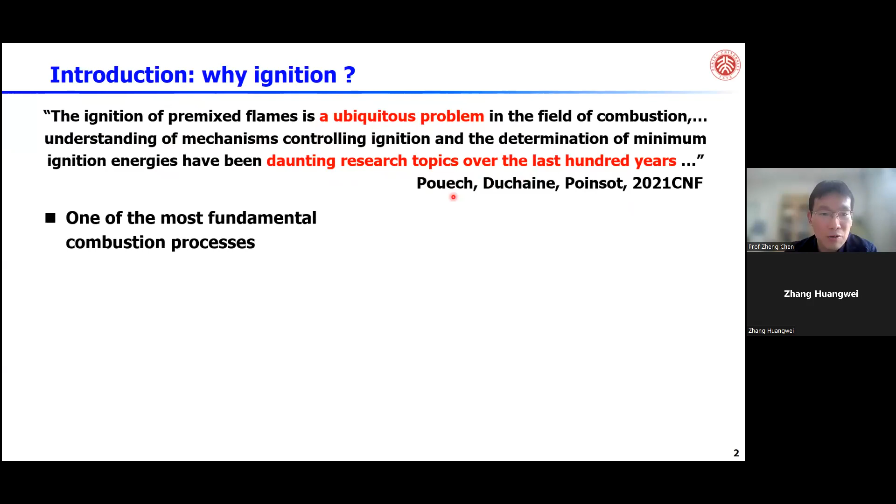Let's look at the applications of ignition. For example, ignition is very important to control in internal combustion engines and to develop superlean combustion. Recently, to meet the challenge of environmental regulation, people are trying to develop high efficiency internal combustion engines. In Japan, they have a program with a target for efficiency to reach about 50%. Basically, they use superlean combustion because superlean combustion has low heat loss to the wall, which can increase thermal efficiency to 50%.

However, if you have a mixture in a superlean condition, it's very difficult to ignite, especially when the mixture is near the flame limit. It's kind of difficult to ignite the mixture. So we need to understand ignition at this kind of superlean condition and make sure that we can get a successful ignition for superlean conditions.

Another example is about high altitude relight in jet engines. If you work under high altitude conditions with low pressure and low temperature, it's also very difficult to ignite. So you need to find some method to ensure that you can achieve successful ignition.

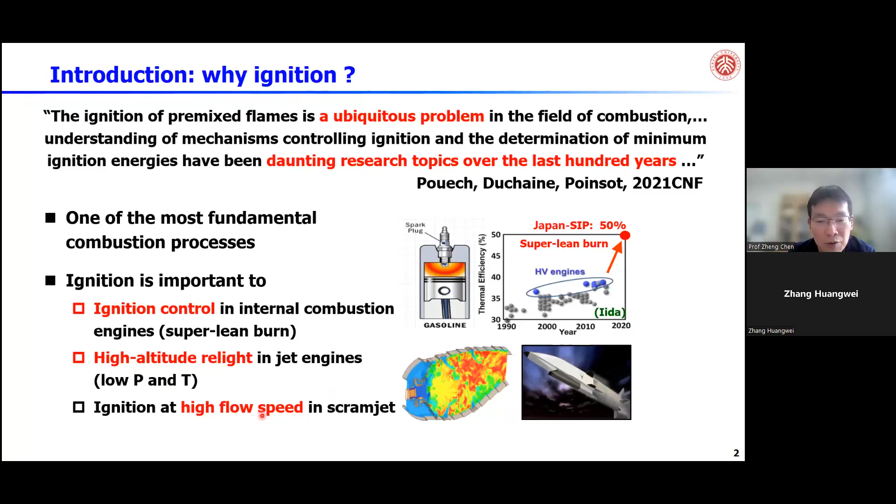The third application is about high-speed combustion, for example in a scramjet. In a scramjet, they have a very high-speed flow, so it's very difficult to ignite the mixture in a high-speed incoming flow. You need to find some method to ensure that you can maintain successful ignition.

The last example is actually trying to avoid ignition. For example, in fire safety and explosion, hot particles and accidental hot spots can initiate ignition and flame propagation. So we need to understand the mechanism for ignition, so that we can find effective ways to prevent ignition.

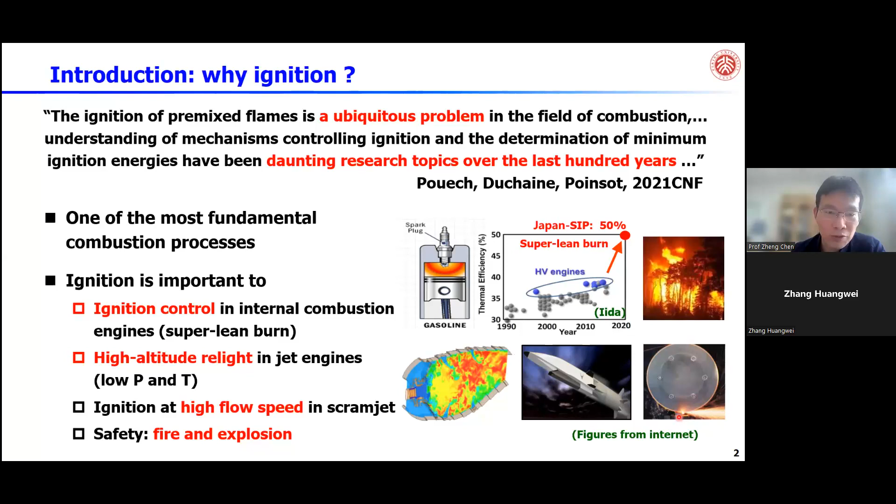So basically, this is the background for ignition. Ignition is very important, and there are many studies on ignition. This is a classical experiment on ignition: if you have a pair of electrodes and there's a discharge, this forms a plasma kernel, and eventually it can lead to ignition and flame propagation.

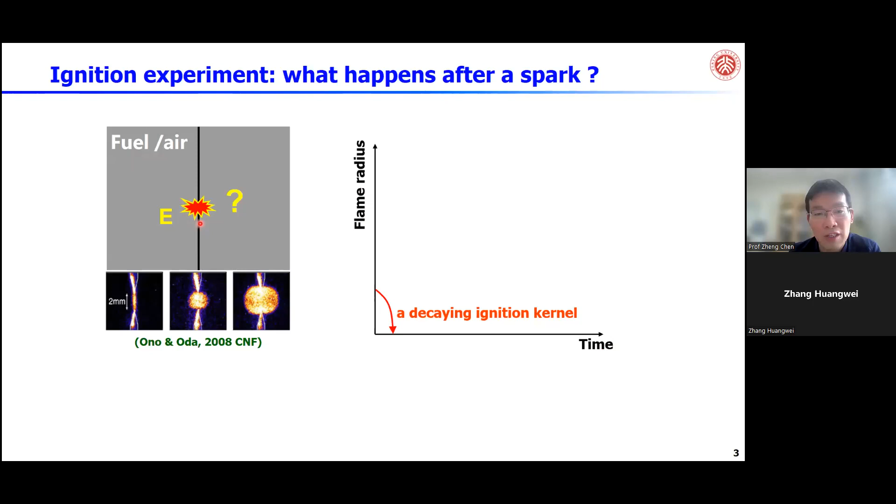Assume you have a fuel mixture and electrodes, and the discharge can get different ignition results depending on the energy and also the mixture condition. If we plot the flame radius as a function of time, the first scenario shows a decaying ignition kernel. Basically, if the mixture is below the inflammable limit, you cannot ignite it, or if the ignition energy is too low, you also cannot ignite it.

So this is the decay ignition kernel. The second case is that you have a stationary flame ball, which means that the flame kernel radius slightly increases, and at a certain stage it will remain constant. This kind of flame ball was only observed in microgravity experiments.

The third case is a self-extinguishing flame. The flame radius will increase continuously. At a certain stage, it will suddenly extinguish, so the flame just disappears. This is also observed in microgravity experiments.

The last scenario is that the flame radius continuously increases with time, so you have a propagating spherical flame that continuously propagates out, and eventually you can get a successful ignition. This depends on the mixture condition and the ignition energy. Basically, you have different outcomes from a spark ignition.

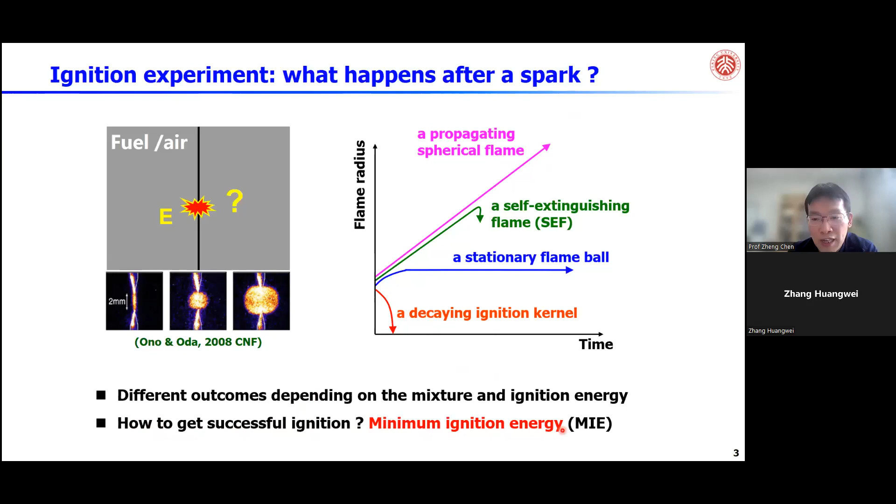So the question is that we are focused on how to get successful ignition, and we are interested in the minimum ignition energy that can help us achieve successful ignition. From the theoretical part, we are focused on two parameters: the first one is the critical length scale, and the second one is the minimum ignition energy.

The question is what is the critical length scale for flame ignition, and how is it related to the minimum ignition energy? If you read the textbook for combustion, there is a so-called thermal theory for ignition. It was mentioned that flame thickness basically is the critical length scale for ignition.

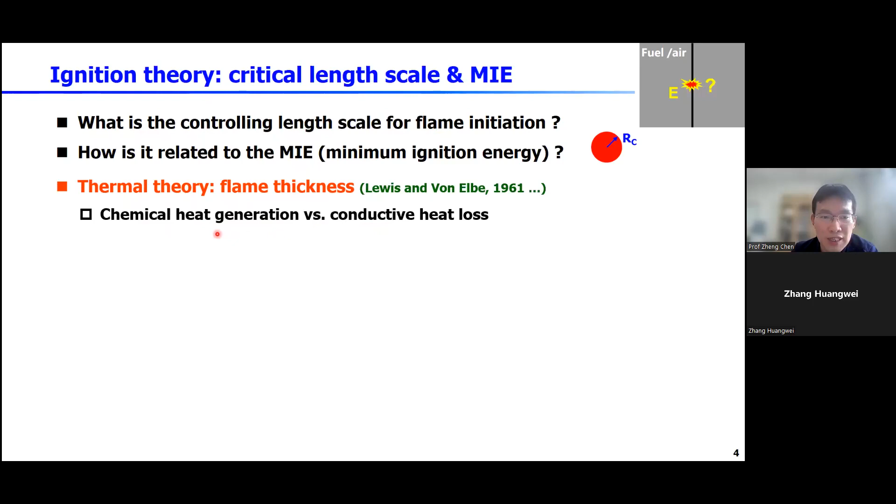Why is it flame thickness? It's based on the competition between chemical heat release generation and the conductive heat loss. If you have a successful ignition, the chemical heat release should be higher than the heat loss. If you look at the governing equation for temperature, there is the heat conduction loss term, and the generation term due to chemical reaction.

The critical condition is basically when these two terms balance. We know that the reaction heat release is proportional to the volume of the ignition kernel, and the heat loss is proportional to the surface area multiplied by the temperature gradient. After some manipulation, we can get that the critical radius for ignition is proportional to the flame thickness.

So this is written in the textbook: the minimum ignition kernel radius size is proportional to the flame thickness. And the minimum ignition energy is basically proportional to the cube of the flame thickness multiplied by the temperature increase from the initial temperature to the adiabatic flame temperature. This is a good estimation of the minimum ignition energy using the flame thickness.

This also helps explain why high altitude ignition is difficult, because at high altitude conditions you have low pressure. Low pressure means you have large flame thickness, and once you have large flame thickness, the ignition energy should be large. So it's very difficult to ignite at high altitude conditions.

But this theory is basically only focused on the heat loss and heat generation. It doesn't consider the fuel consumption. So afterwards, there were some theory improvements on this theory.

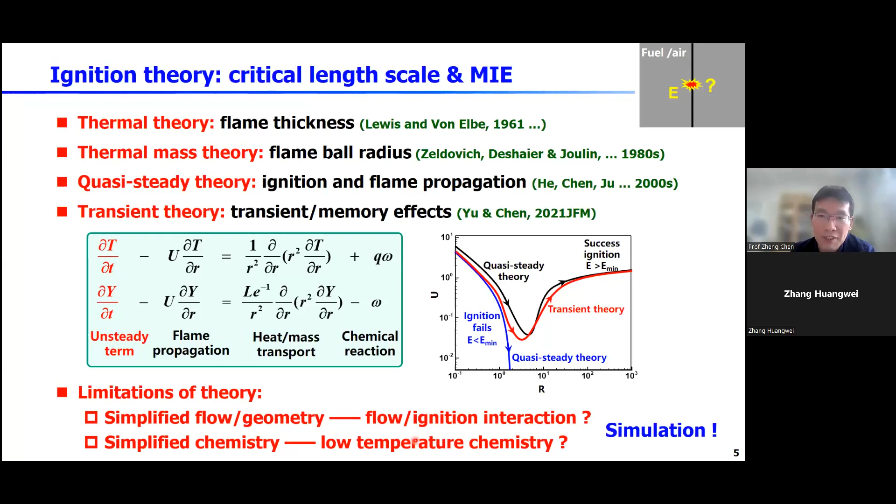However, in the ignition simulation, there are many challenges. This was also mentioned in the last seminar given by Professor Suo Yang. The ignition process is a multi-physics process. It includes plasma, shockwave, flow, and transport and reactions. And it's also a multi-scale problem.

In terms of time scale, it's picosecond, nanosecond, microsecond, and millisecond. And in length scale, it covers from micrometer, millimeter to meters.

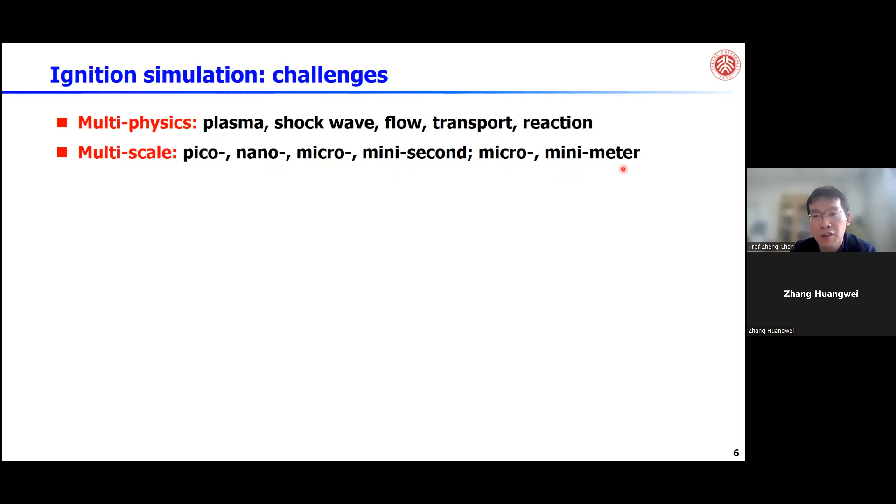For example, if you look at spark ignition, there are different phases. From the beginning, there's a pre-discharge phase, a breakdown phase, an arc phase, and a glow discharge. These different phases have different plasma chemistry and reaction processes involved. So it's very difficult to mimic and reproduce all these phases in the simulation.

If you look at laser ignition, similar to spark ignition, it covers a broad range of time scales. The initial laser pulse is on the scale of nanoseconds, and plasma emission is from nanosecond to microsecond to millisecond. The shockwave is around microsecond, and the ignition delay time or flame kernel development is from microsecond to millisecond. The combustion process and pressure rise phase is about millisecond to second.

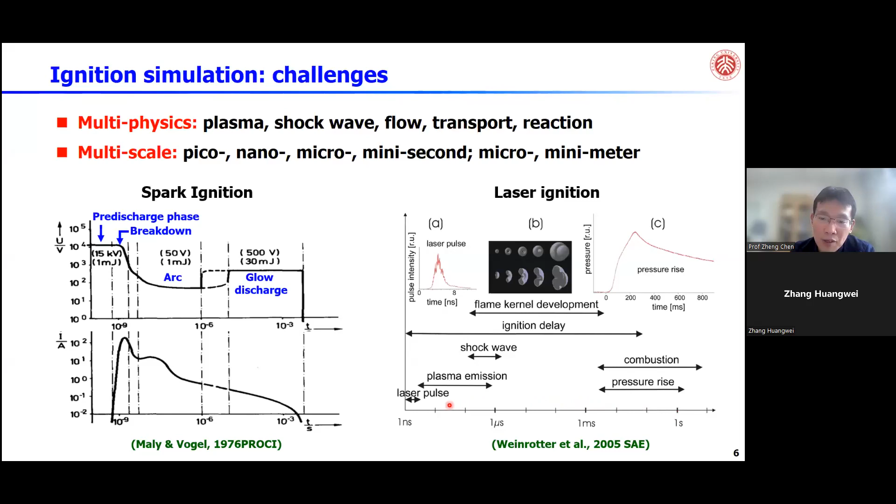So it's a very complicated problem with multi-physics and multi-scales. People are trying to use OpenFOAM to reproduce this kind of ignition process.

This work was done by a France group. They didn't use OpenFOAM, they just proposed phenomenological modeling for the ignition process. For example, in their simulation, the nanosecond repetitive pulse discharge model distributes discharge energy using different paths, for chemical energy, heating energy, and vibration energy, into the molecules. So it's a very complex problem.

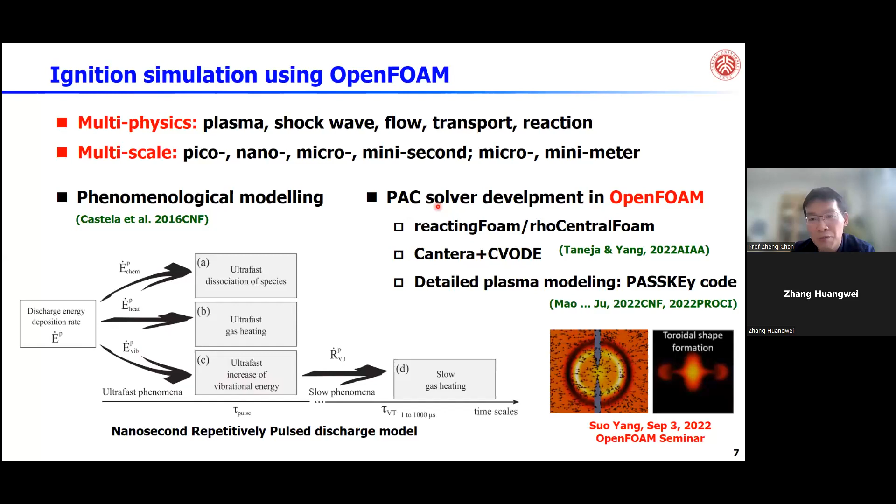In the last seminar given by Suo Yang, about a week ago, he talked about using the plasma assisted combustion solver developed based on OpenFOAM. They have two types of solver: one based on reactingFoam, the other based on rhoCentralFoam.

Basically, they want to simulate ignition in incompressible flow and compressible flow. They compile CANTERA and CVODE into their code. And to give detailed plasma modeling, they also use the PASSKEy code, which was used by Professor Ju's group in their recent work for ignition simulation.

So if you are interested in this kind of plasma ignition process, I refer you to the seminar given by Professor Suo Yang. In my talk, I will not talk about plasma stuff, and we only use a simplified ignition model to study the ignition process.

And they have efficient chemistry computations, with CVODE and automatic code generation for different chemistry, and also load balancing, which gives very good parallelization performance. It has excellent scalability and performance for reacting flow simulation.

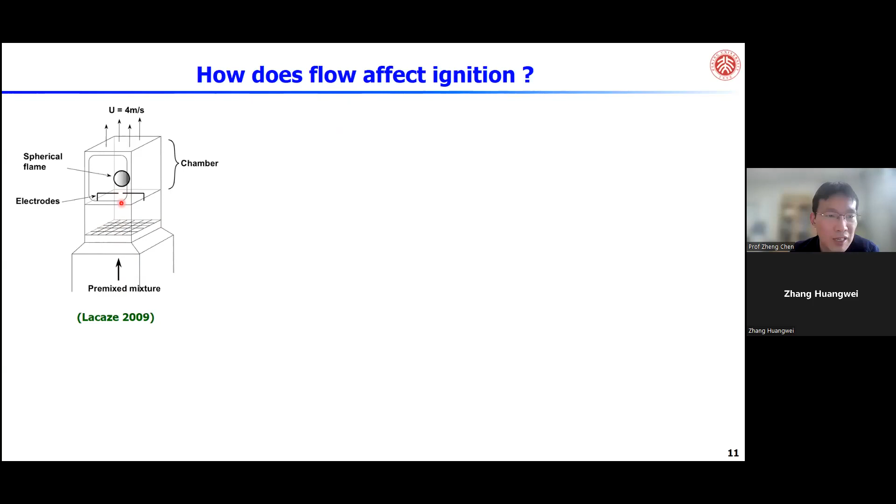In experiments, people usually use a static mixture, without considering incoming flow, to measure the ignition energy. But in practical engines, the inlet flow has some velocity that pushes the ignition kernel away from the electrodes. This flow field affects the ignition kernel development and the ignition energy.

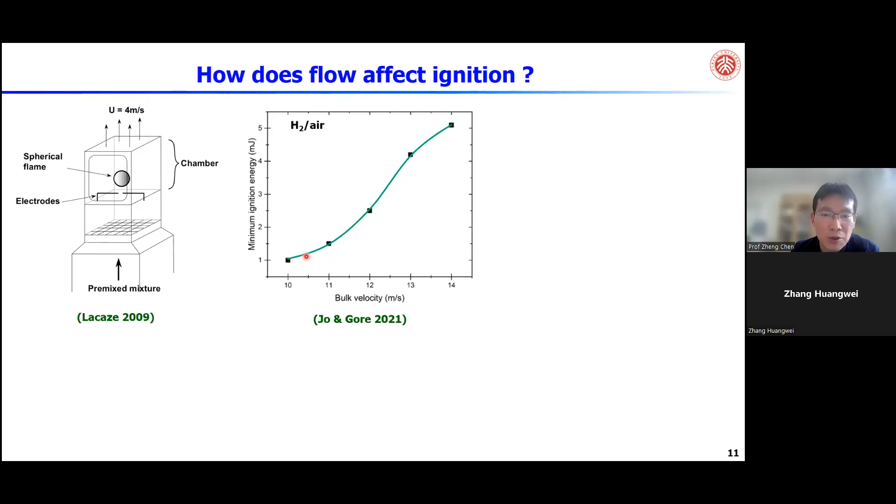This is from a recent experiment at Purdue University. They measured the ignition energy for hydrogen-air at different bulk velocities. You can see that the ignition energy increases continuously with the incoming flow velocity, and this is easy to understand.

As mentioned before, there is a conduction heat loss. If you have a uniform flow from bottom to the upside, the flow will bring convection heat loss. This convection heat loss will increase the heat loss and then make ignition more difficult. That's why the ignition energy increases with the incoming flow, because this term becomes larger and the heat loss becomes stronger.

Also, people are doing experiments using turbulence. For example, they have a mesh that can generate turbulence, and they can modify the mesh turbulent intensity, this U prime. Their measurement finds that the minimum ignition energy also increases with the turbulent intensity.

They have two stages, but it's kind of monotonically increasing. This is easy to understand, because if you have turbulence, there is turbulent transport. Look at this formula for heat conductivity: lambda 0 means the heat conductivity due to laminar flow, due to random motion of the molecules. The red part is the effective conductivity due to turbulence, because small vortices enhance heat transfer in the mixture. So this turbulent transport increases heat conduction, and therefore increases heat loss. This means the minimum ignition energy will increase with turbulent intensity. It's very easy to understand.

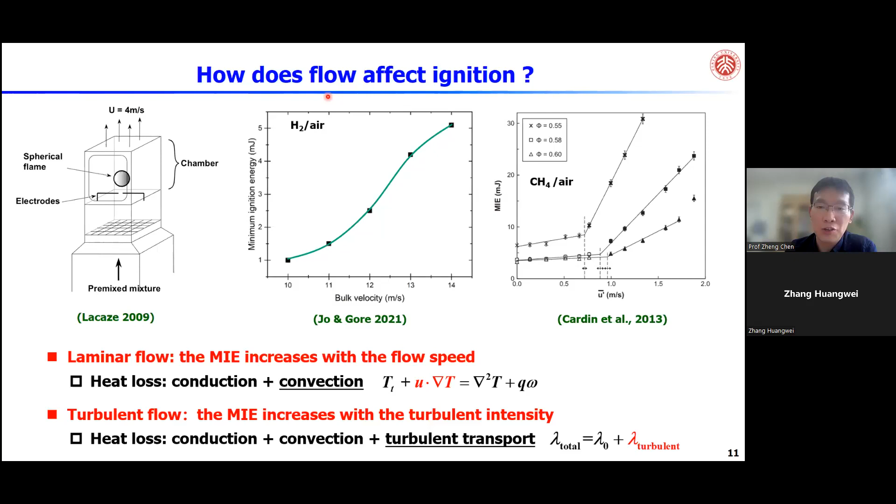So the answer to this question is that the flow will increase the ignition energy, and will inhibit ignition.

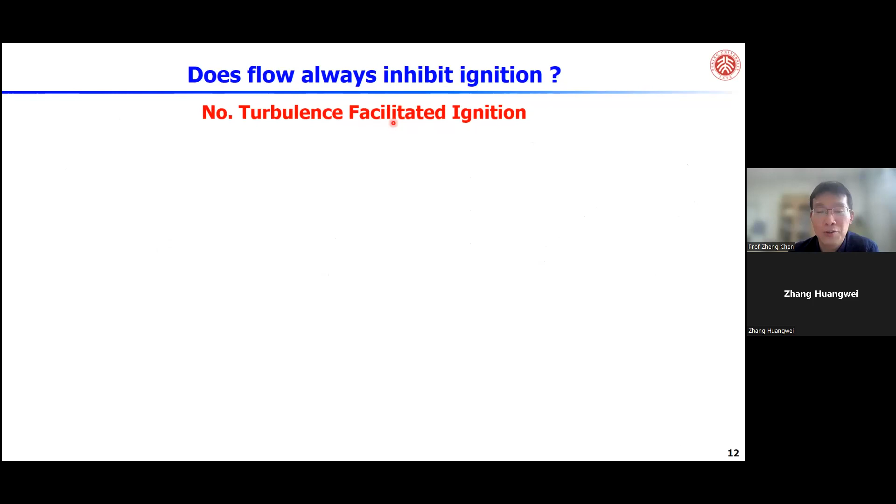However, we have the question: does the flow always inhibit ignition? The answer is no. Turbulence actually sometimes can facilitate ignition, it can help the ignition. This was found by Professor Law's group about 8 years ago. They have a paper in PRL.

That is in contradiction with our argument just now, because we mentioned turbulence will increase the heat loss and make ignition more difficult. However, the experiment found that ignition can be easier with turbulence. So the question is, why?

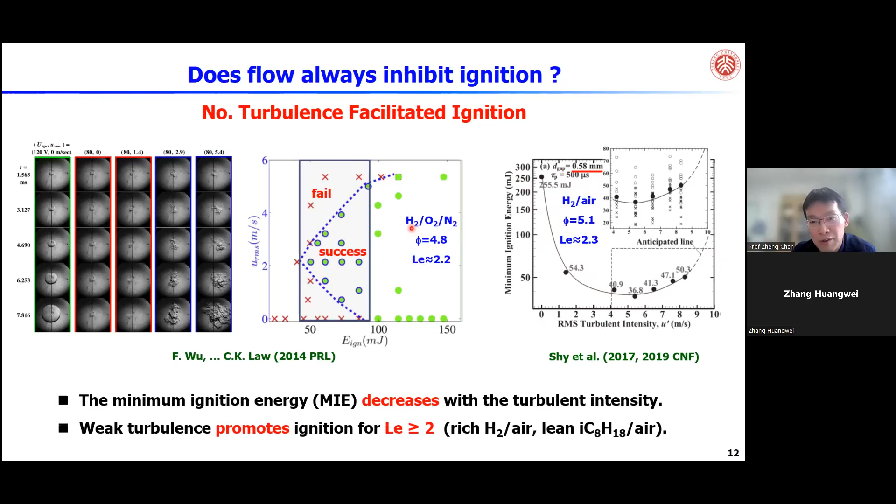Actually, they only found this for mixtures with large Lewis number. For example, for rich hydrogen, the Lewis number is about 2.2, and for hydrogen air it's about 2.3. The experiments basically show that the minimum ignition energy will decrease with the turbulent intensity for certain conditions, and weaker turbulence basically promotes ignition for Lewis number larger than 2, for rich hydrogen air and lean isooctane air. So this is kind of difficult to understand.

Actually, even though this experiment was done about 8 years ago, people are still working on how to explain this phenomenon. So why can turbulence enhance the ignition and help ignition? There are some explanations. For example, Professor Steven Shy gives the explanation as follows.

They think that when you have turbulence, the flame kernel will have this kind of deformed surface, and in some local positions, it's actually negative stretch. If you look at the stretch, this is the definition of flame stretch, and the stretch effect on the flame can be approximated by this formula: the Zeldovich number multiplied by the Lewis number and the stretch.

If you have positive stretch and Lewis number larger than 1, this part is negative, this is positive, which means this overall term is negative, meaning this kind of stretch will inhibit flame propagation. However, if you have negative stretch with a larger Lewis number, this is negative, this is negative, so the sigma becomes positive, which means negative stretch can promote ignition.

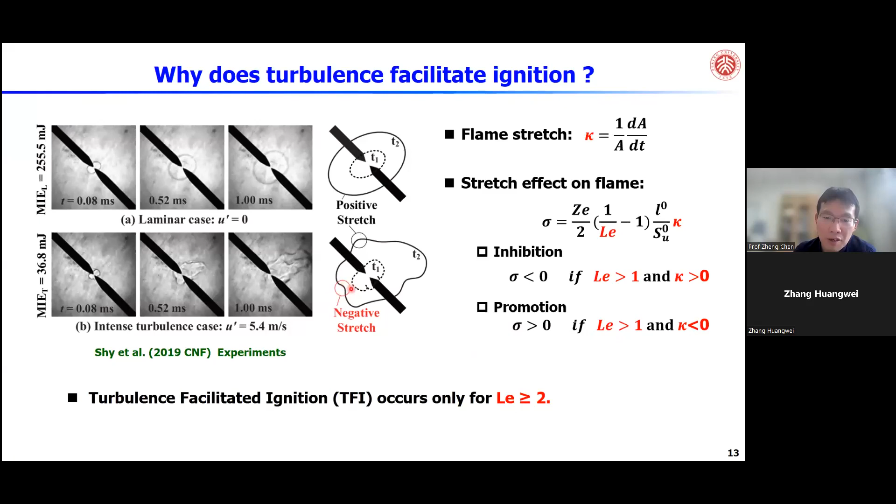So this is their explanation based on the flame curvature and the flame stretch. However, this kind of experiment was never repeated by simulation. So this is some three-dimensional direct simulation on the ignition in a turbulent flow. The top line is ignition in a flow velocity equal to 0, so it's laminar flame propagation.

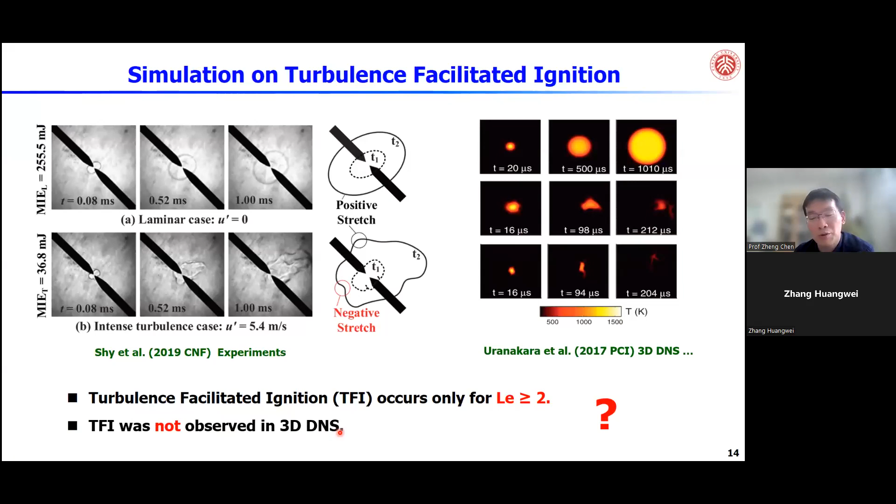But in these bottom two columns, there is flow turbulence that affects the ignition front. We can say that turbulence always inhibits the ignition. So turbulence facilitated ignition, TFI, was not observed in three-dimensional direct simulation. The simulation never repeats this kind of experiment, so we are wondering why we cannot repeat the experiments. This motivates our work.

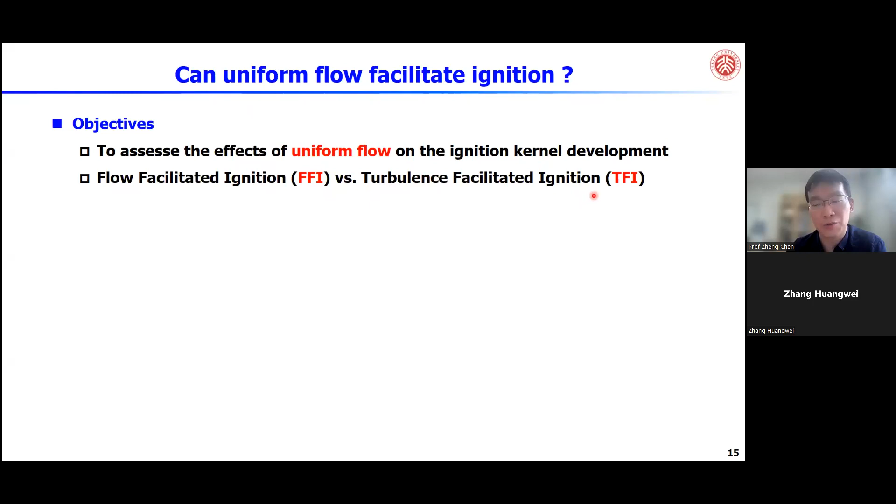Basically, we want to assess the effects of uniform flow on the ignition kernel development. We don't want to study turbulence, because turbulence is a very complicated process with many factors affecting ignition. We just simplify the problem to use uniform flow. And we actually found that flow facilitated ignition using this uniform flow has similar physics as the turbulence facilitated ignition, which I will talk about later.

So this is our model and method. Basically, we consider a hydrogen-air mixture at room temperature and pressure. We do 2D and 3D simulation. For the 2D static case with no flow, it's an axisymmetric process. But for three-dimensional, we have a lateral flow to the electrodes, and this ignition kernel will be pushed downward, so it's not axisymmetric. We need to do the three-dimensional simulation.

And for the ignition part, we use a very simple model. We just add the energy source term in the energy equation. This is the ignition energy equation. We have the cross surface area pi Re squared, and this d gap is gap distance, so this is the volume of the ignition kernel. This is the time duration for the ignition energy deposition, and this is the energy density for the ignition kernel.

We have the electrode radius fixed at 0.32 millimeter, and the gap distance we can change. The energy duration for the deposition is about 0.2 millisecond. We use EBIdnsFoam, based on OpenFOAM developed by KIT. More details can be found in our recent paper published at the Combustion Symposium.

So this is the first result on a quiescent mixture - we don't consider the incoming flow. There are different stages. First, you have energy deposition, the temperature increases, but there is no chemical heat release yet, because the chemical heat release has some auto-ignition delay time. After about 0.2 milliseconds, you have heat release, which generates an ignition kernel. This is the ignition kernel front - it's asymmetrical, and eventually the kernel propagates out.

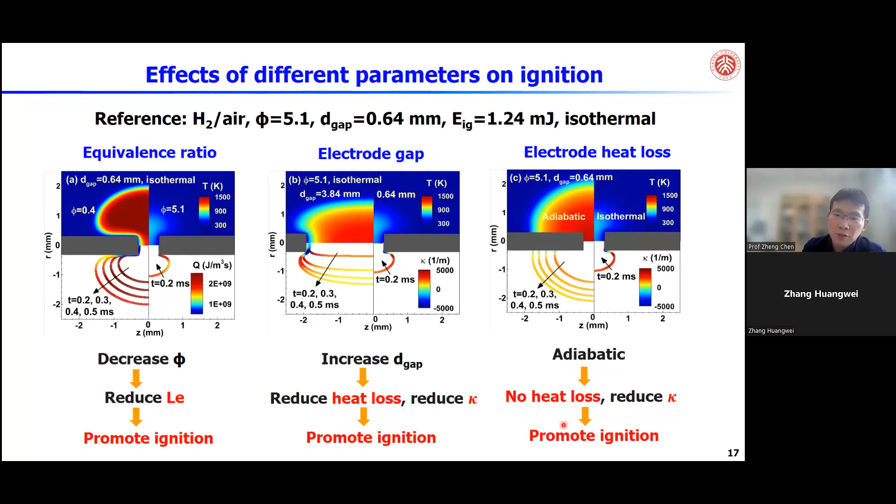So based on this knowledge, we next study the flow effect on ignition kernel propagation. There are three cases: a fuel lean case, a fuel rich case with a larger gap distance, and a fuel rich case at small gap distance.

For the fuel lean case, the incoming flow is fixed at 3 meters per second. It will make the ignition kernel fail to ignite, because the incoming flow actually enhances the convective heat loss.

It makes ignition fail. If you have a larger gap distance, it also cannot ignite the mixture, because even though the large gap distance reduces the ignition heat loss to the electrodes, the flow cannot further help reduce the heat loss to the electrodes.

Only for case C, the rich case, which was done in experiments for turbulent assisted ignition — only for the fuel rich case and small gap distance — can you see that the flow moves the ignition kernel away from the electrodes and greatly reduces the heat loss.

So that's probably the reason we can achieve flow-facilitated ignition. In experiments, turbulent facilitated ignition only occurs at a small gap distance like this, and only at a large Lewis number. This is also a large Lewis number for the rich hydrogen-air case, about 2.3. So basically this simulation is consistent with the experiments.

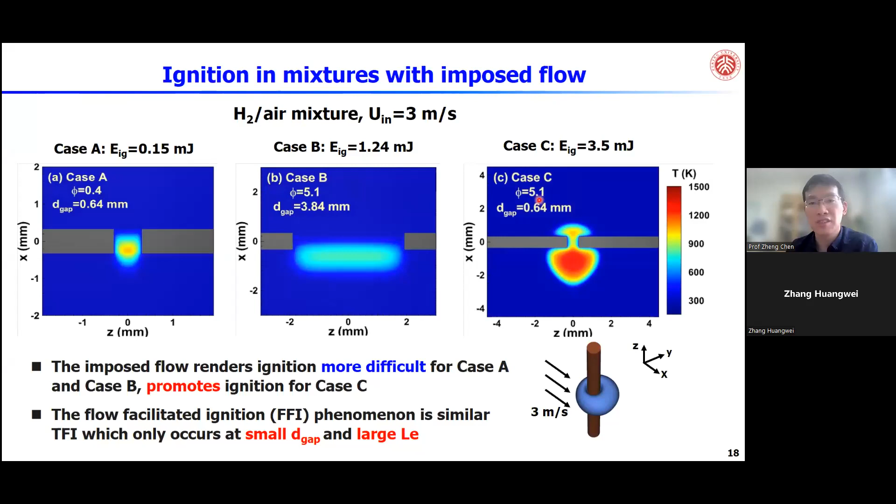So there are two reasons we can get flow-facilitated ignition. Basically, the flow can push the ignition kernel away from the electrodes to reduce heat loss. It can also change the shape and geometry of the flame front to reduce the stretch effect.

So basically, we explain why we can get flow-facilitated ignition.

In turbulence, people use negative stretch to explain ignition. For turbulent facilitated ignition, we think this is not fully correct. You also need to consider the electrode effect.

First, we look at ignition caused by hot particles. Let's look at the background. Hot particle ignition is important to aircraft safety, because if you have lightning producing hot spots, it can cause this kind of accident.

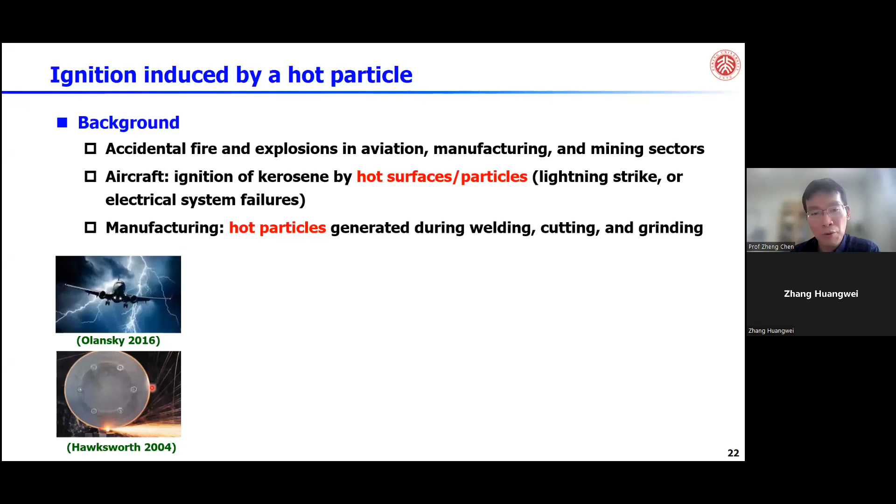In manufacturing, a hot particle can generate an ignition process. So people are working on ignition temperature for different mixtures and particle sizes, for methane, for hydrogen, at different particle sizes. They have experiments, simulation, and recently we also conduct some theory.

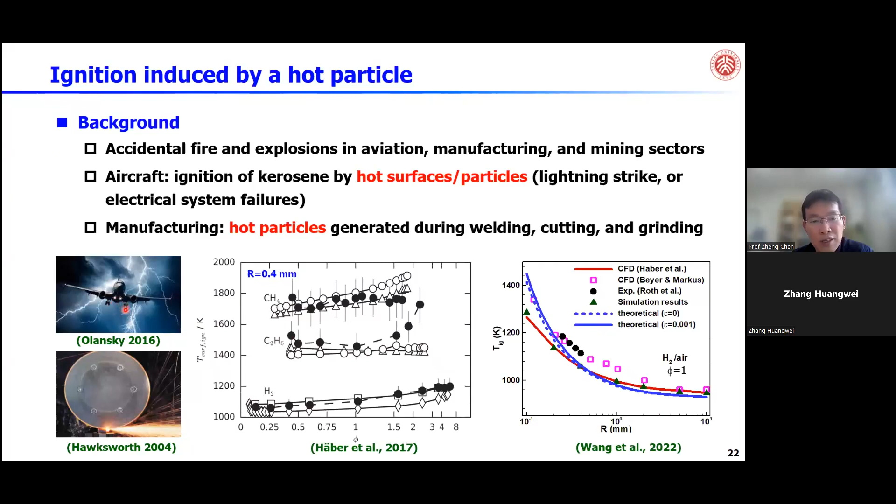However, in all these experiments, they didn't consider the low temperature chemistry. For example, for hydrocarbon fuel in jet fuel, they have low temperature chemistry. So we want to know how low temperature chemistry affects ignition.

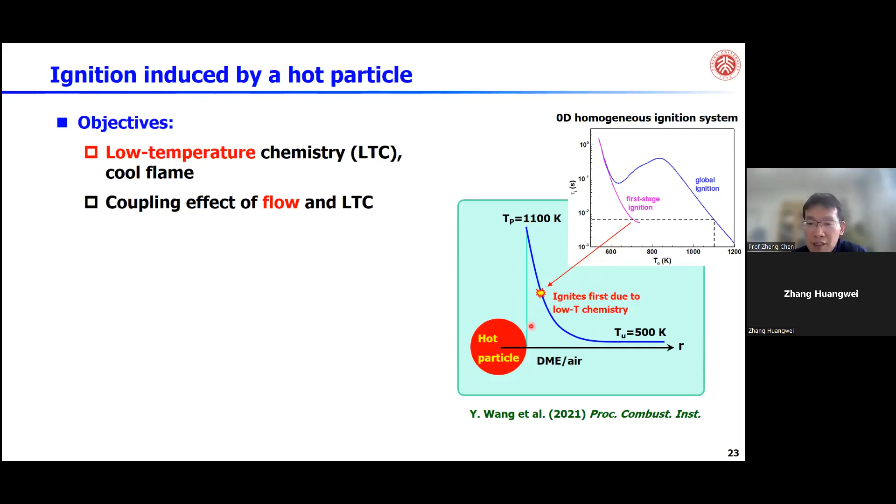For example, if we look at this scenario, if you have a hot particle at high temperature, about 1100 K, and the room temperature is about 500 K, actually the ignition doesn't happen at the surface, because even though the surface has a high temperature, it's in the NTC regime, meaning there's some place with the highest temperature due to the low temperature chemistry. So the ignition might happen some distance away from the surface.

So we use one-dimensional and two-dimensional simulation to study how the low temperature chemistry affects this kind of particle ignition.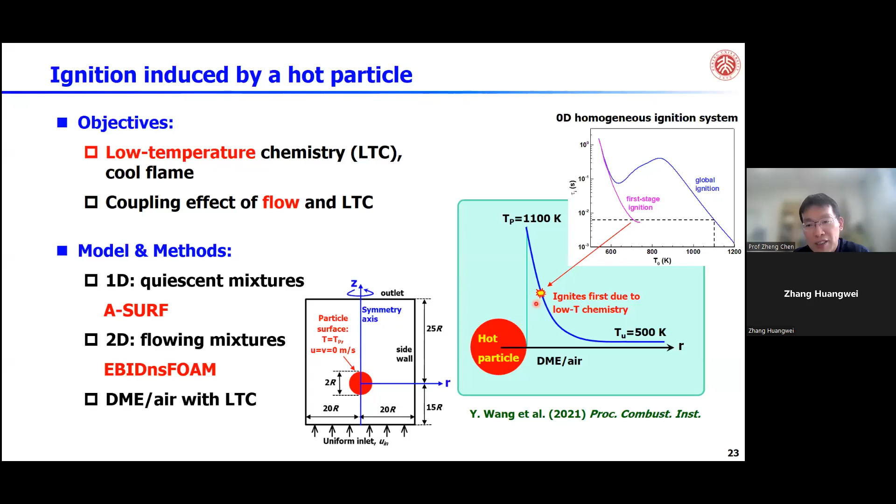The first scenario considers just the one-dimensional case, meaning there is no inlet flow. Everything is static, so it's a spherically symmetrical problem. We just do one-dimensional simulation. Here is the radius, and here is the time. The particle radius is about 1 millimeter, so this is the particle side.

Here is the heat release rate contours. We consider the particle temperature to be 1300 K. You can see there is a weak heat release rate corresponding to a cool flame. And on the surface, there's a hot temperature chemistry-induced ignition, because the heat release there is much higher than in the cool flame region.

We also calculated the propagation speed. We found the cool flame is pretty slow, only 6 centimeters per second, but the hot flame is about 5.4 meters per second, much faster. Eventually the hot flame can catch up and merge with the cold flame. In this simulation, we consider the low temperature chemistry.

If we remove the low temperature chemistry, we found you only get a hot flame, meaning there is no cold flame. We also calculated the ignition delay time for different particle temperatures. We found that low temperature chemistry greatly reduces the ignition delay time, because it accelerates the ignition process and thereby reduces the required ignition temperature.

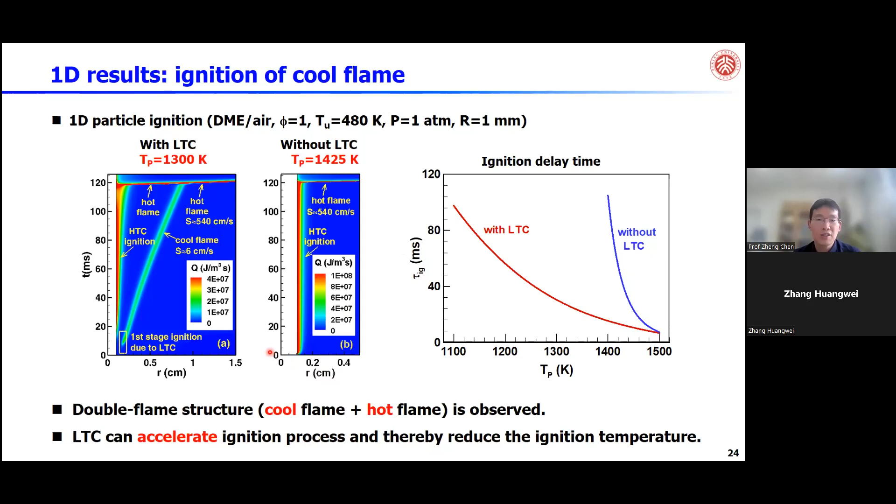So this is the one-dimensional case, and we also consider the two-dimensional case. There's a uniform incoming flow from the bottom to the top. You can see the flow velocity is small, 0.15 meters per second. The right side shows the concentration of CH2O, and the left side shows the temperature.

You can see on the right side this curve, labeled ABC, is basically a cold flame, because the temperature is below 1000 K, and there's a lot of CH2O produced, due to low temperature chemistry. But on the surface, the temperature increases to 1500 K — this is high temperature chemistry induced. So there is a cold flame propagating outside, and also a hot flame propagating from inside to outside.

Eventually the hot flame becomes pretty large, and the cold flame is still outside, but the cold flame speed is much smaller than the hot flame speed. So eventually the hot flame catches up and merges with the cold flame, so only one hot flame can be observed. This is for low flow speed.

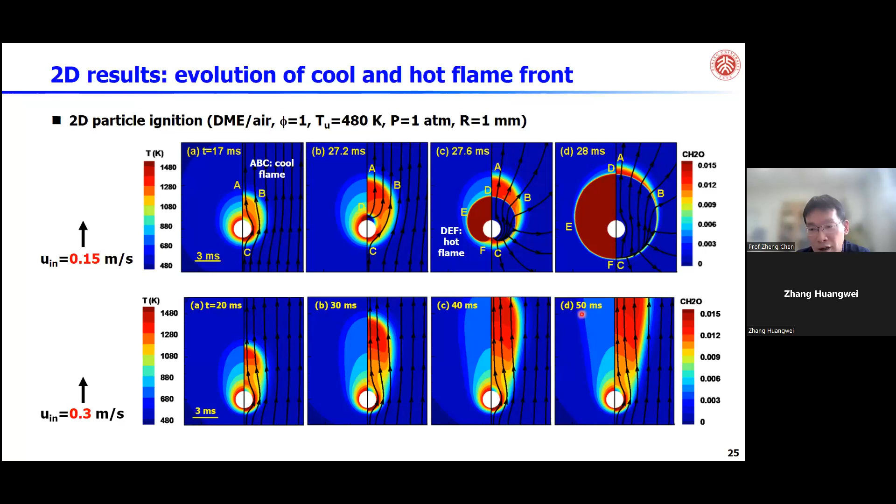Here we don't have heat loss. Actually, this promotion effect of flow on ignition is due to the boundary layer development at different flow speeds.

So this is on the hot particle, basically pre-mixed flame. We also look at the ignition in a mixing layer, which is a non-pre-mixed flame. We want to know how the low temperature chemistry affects the ignition in a mixing layer.

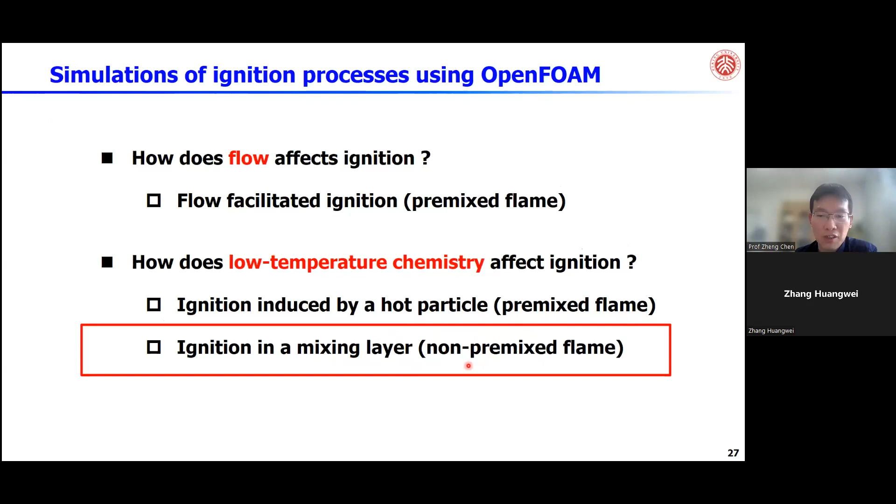Actually, for the non-homogeneous ignition, they have broader application. For example, in the engine, you have a jet of fuel injected into hot air, and there's some local ignition, actually it's non-pre-mixed ignition. And in the internal combustion engine, people can see that there's a cold flame induced during the injection, and there's a cold flame front propagation. However, there is no study on how the low temperature chemistry and the cold flame affects the ignition of the non-pre-mixed flame. So this motivates our work.

Basically, we want to know how the low temperature chemistry affects the forced ignition in a mixing layer, and we want to know how the cold flame evolves into a hot flame.

So basically, our model is a mixing layer. In the top is the dimethyl ether, and in the bottom is the air. And the mixing layer we fix about 2 millimeters. And in the center we have a hot spot, and it's an axisymmetric problem. The hot spot basically has a fixed radius about 0.5 millimeters.

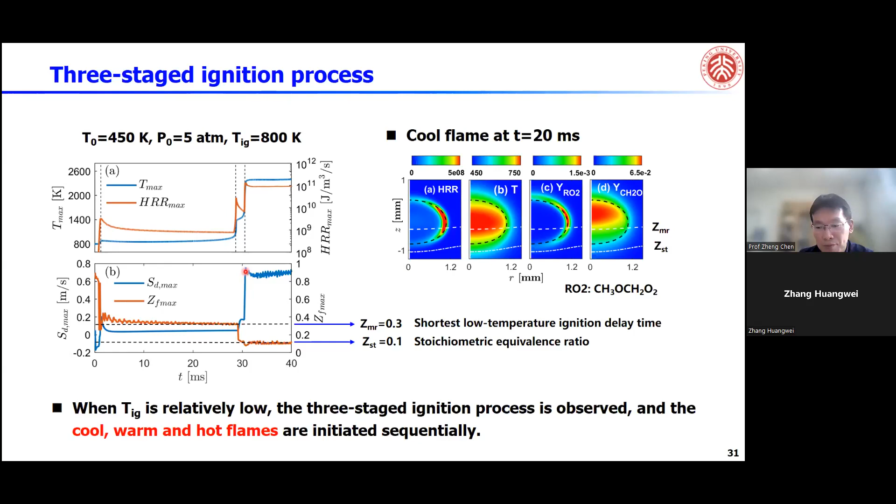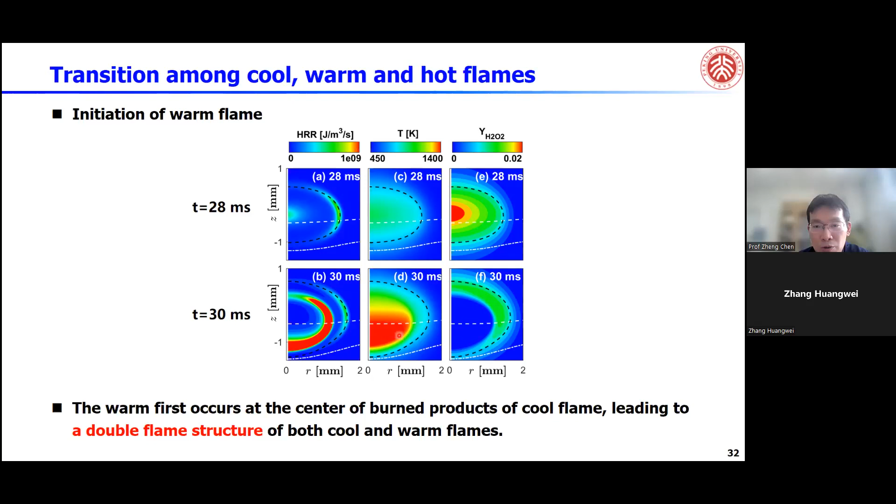So this is the initiation of the warm flame from 28 milliseconds to 30 milliseconds. You can see the stage where the heat release becomes much stronger, and H2O2 can be gradually produced, and the temperature will increase to around 1000 K. Furthermore, if the time is larger than 30 milliseconds, it will evolve into a hot flame, because the cool flame stage and the warm flame stage are actually very short. This is the warm flame stage. Eventually, it will evolve into a hot flame.

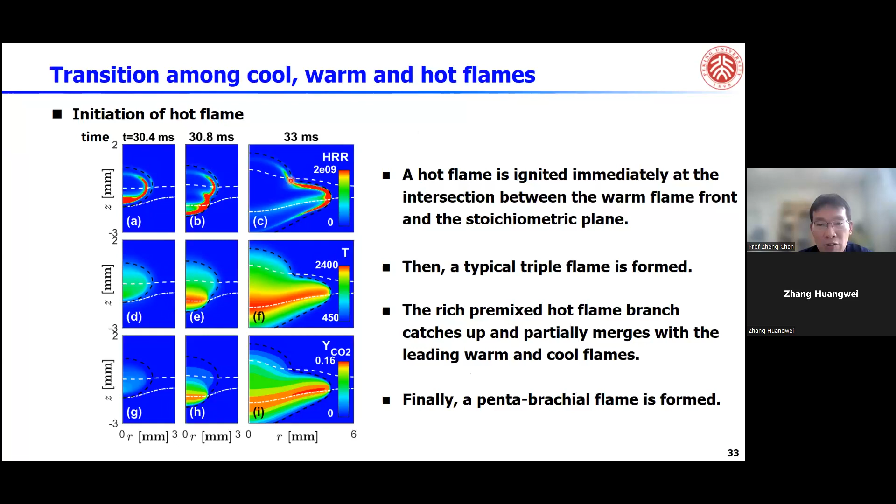So the hot flame will catch up with the leading cool flame and evolve into a very complicated penta-brachial flame structure, like this one. Actually, this part still has some cool flames. So this basically shows that you have different stages: a cool flame, a warm flame, and a hot flame. This is similar to a homogeneous ignition process.

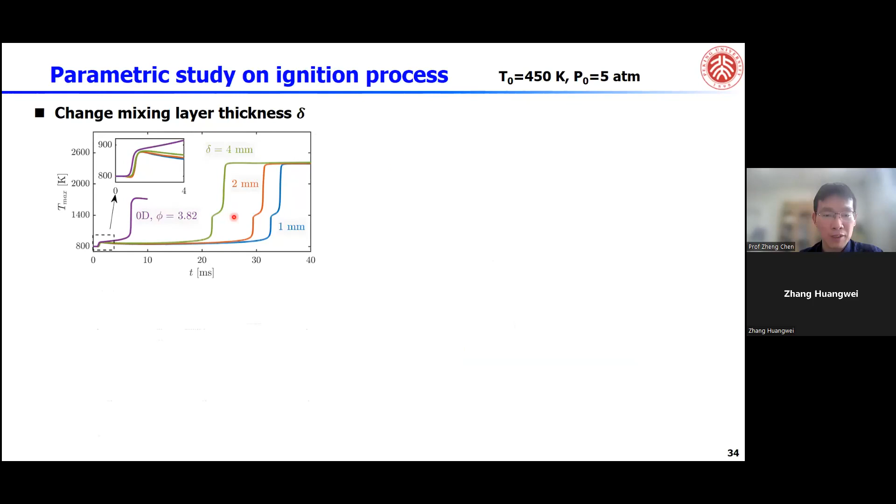If you change the mixing layer thickness, you can have some effect on the cool flame development. Also, if you change the hotspot size and change the position of the hotspot, it also affects the ignition, because this mixing layer has different values of the mixture fraction.

At the bottom is air, at the top is dimethyl ether. Actually, on the top side, it's easier to get a cool flame. On the bottom side, it's easier to get the hot flame. So different ignition modes can be achieved by changing the temperature, size, and position of the hotspot.

We also analyzed the displacement speed, which basically consists of reaction and diffusion. We decomposed the diffusion path into normal diffusion and tangential diffusion. We found that the flame is balanced by the reaction and the diffusion, meaning it's actually self-sustained. It's not an auto-ignition process. It's a flame because the diffusion is balanced by the reaction.

We also found that the diffusion in the tangential direction is very important, so it's a kind of partial premixed flame instead of a diffusion flame. So we found this is a self-sustained partial premixed flame.

For the premixed flame part, we found that the flame propagation speed, or displacement speed, changes linearly with the stretch. We can get the Markstein length for the cool flame, which is a very important parameter to correct the stretch effect on the cool flame.

We found it interesting that the cool flame speed is not sensitive to pressure, because for the hot flame, at high pressure you have low flame speed. But the cool flame is not very sensitive to pressure. This is because low temperature chemistry is not so pressure dependent.

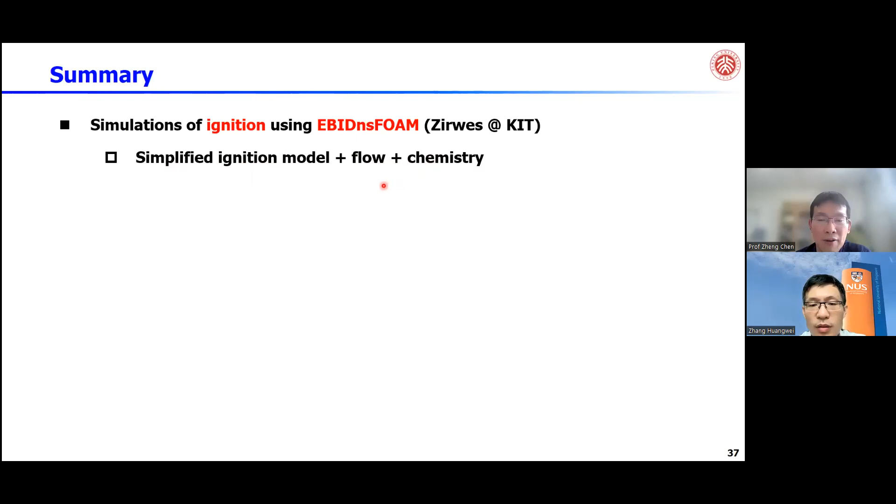Basically, I mentioned the simulation of ignition using OpenFOAM, developed by KIT's group, called EBIDnsFOAM. We use a simplified ignition model, just some energy deposition for the energy equation, then coupled with flow and chemistry to study different ignition processes and understand the fundamental physics of ignition. So basically we answered two questions.

The first question is how does flow affect ignition? We found that flow can facilitate ignition because it blows the ignition kernel away from the electrodes and reduces heat loss to the electrodes. It also changes the curvature, which can improve ignition. This helps explain the turbulence-facilitated ignition observed in experiments.

The second question we answered is how does low temperature chemistry affect ignition? The first part is on hot particle ignition. We found that low temperature chemistry can greatly accelerate the hot temperature combustion chemistry at a certain range of hot particle temperature. For the mixing layer, we found a three-stage ignition process consisting of cool flame, warm flame, and hot flame evolution, which is a very complicated process.

So that is my summary.

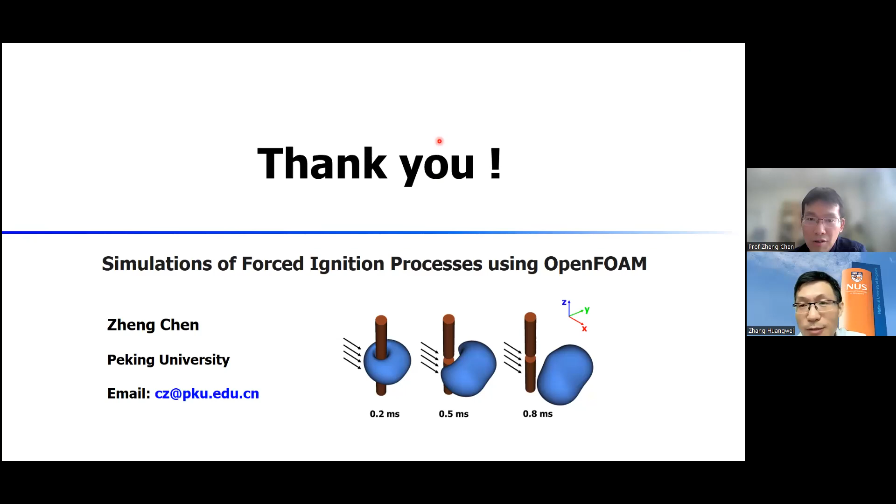No, actually for the mixing layer, it's not pre-mixed. We have dimethyl ether on the top side, and air on the bottom side. So there is a mixing layer, with some kind of parabolic distribution of dimethyl ether and air. So this is pure air, and this is pure fuel. So it's not pre-mixed, though in some regimes there is some kind of pre-mixedness.

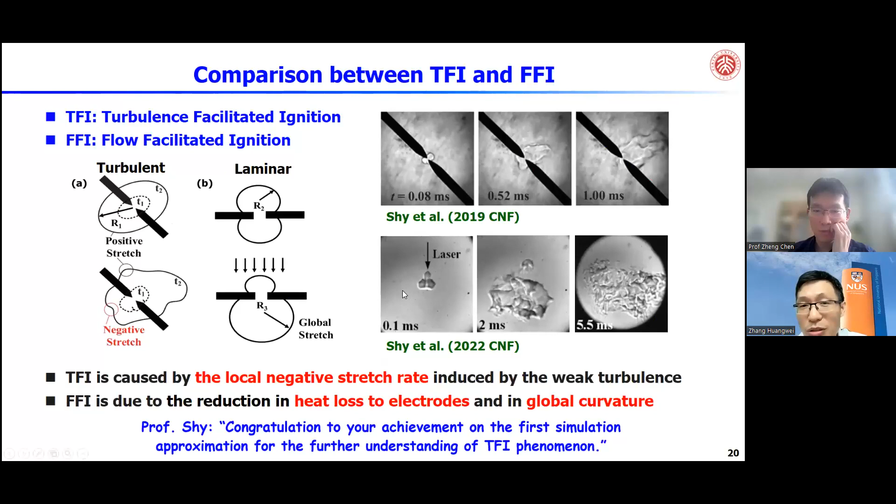Do you have any comments about turbulence properties, such as scalar dissipation or the local turbulence intensity, because very strong fluctuations of the reactive scalars near the spark will also affect the ignition behavior, right?

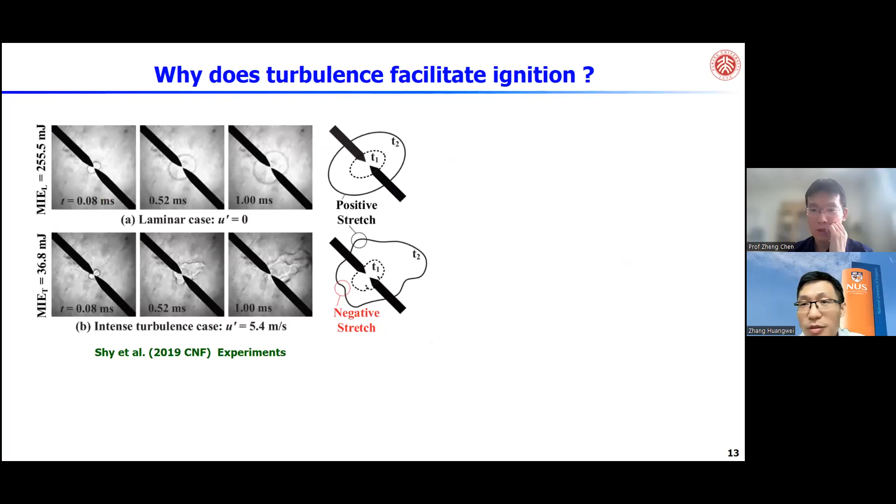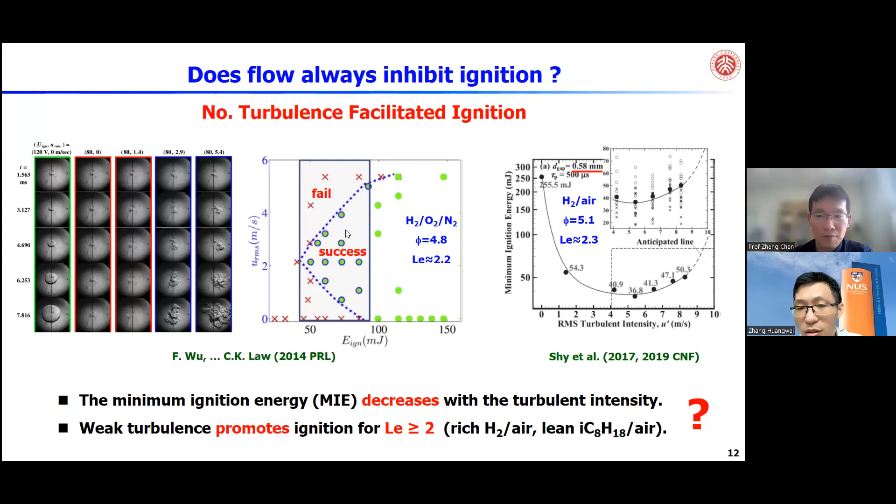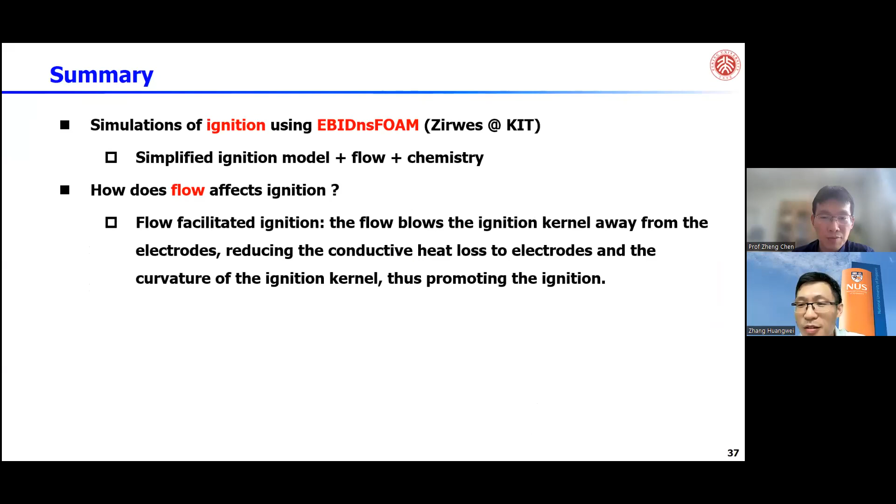It's about the cool-flame speed and how do you calculate it? Because when I do it, I found that if the ambient temperature is relatively high, the transition from cool flame to hot flame propagation will be very quick, so it's very hard to get the cool flame speed. For your case, I want to know how do you calculate it from the post process, or do you do it in 1D or 2D simulation? In the 1D freely propagating flame case, or in other cases?

Thank you, Professor Zhang, for the question, that's a very good question. Here, we only reported results for mixing layer two-dimensional simulation. As you can see in this figure, this is the temperature evolution change with time. You can see there is a broad window for the cool flame development. This is after the cool flame, and the cool flame will sustain, and in this rise is the warm flame. So you have about 20 to 30 milliseconds, enough time to evolve this kind of cool flame.

If you have cases where the cool flame lifetime is very short, it's actually very difficult to calculate the flame speed. So in our simulation, basically it depends on the case, like we have this kind of temperature and pressure. We found that you have a broader window to make sure the cool flame can propagate, and this propagating process is long enough, so we can calculate the cool flame speed using this kind of displacement speed.

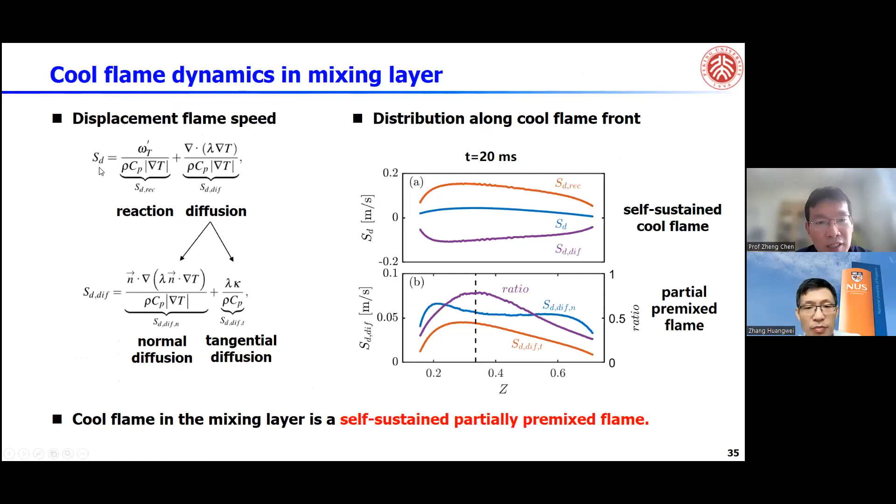So this is actually we use the SD, and because this regime is pretty long, we can see this kind of evolution. This is the evolution of the cool flame, because when the cool flame expands, actually the curvature and the stretch will decrease, so it's propagating this way.

This is for 2D simulation, and we also conduct a one-dimensional simulation, in a similar case, just a spherical flame. If your cool flame is long enough, you have enough time to propagate, you have this kind of flame speed that can change with the stretch rate.

And actually, Professor Zhao in Tennessee, he's also doing this kind of similar simulation. So you should select the condition to make sure that the cool flame has enough time to survive. Otherwise, the cool flame just merges with the hot flame and you don't have time to track this kind of trajectory.

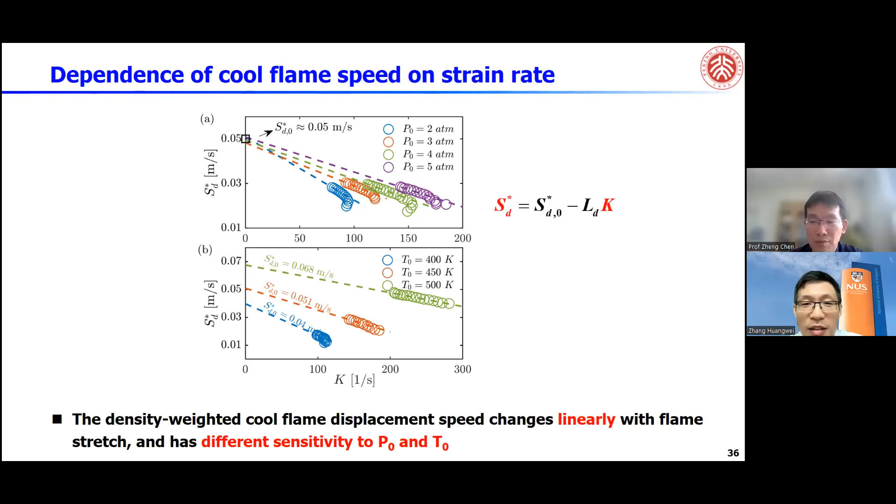Thanks for the nice presentation. I think the results of the flame stretch in turbulent flow affecting ignition are very interesting. But you mentioned also low pressure ignition at higher altitudes, where you have very large flame thickness. And of course, classically, the flame stretch is defined on a 2D surface. So when you have a very thick flame, then of course you have very strong 3D effects throughout the flame front.

Do you think flame stretch is still a good measurement in these situations? You mean low pressure? Yeah, exactly. So when the flame thickness is very large, the flame stretch might vary significantly depending on if you are towards the burned side or the unburned side. So I'm wondering if there's a different quantity that's better suited in these extreme circumstances.

I see your question. Yeah, for the low pressure case, the flame thickness becomes much larger. Basically, the flame stretch or the Markstein length is very sensitive to the contour used to define this value. For example, the stretch, the Markstein length for the unburned gas can be totally different from that for the burned gas. So there is this kind of effect, even for normal pressure, because you can select different temperature contours.

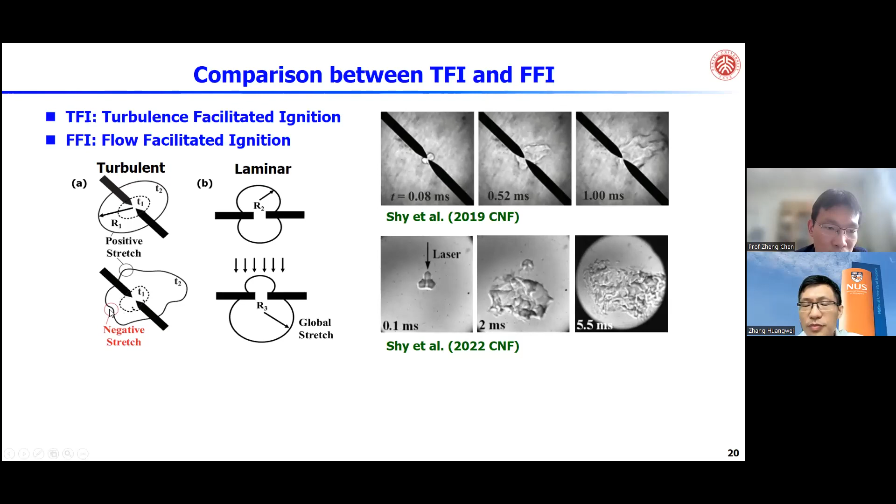But for these turbulent effects, basically if you look at the local stretch, even at low pressure where you have a very thick zone, I think it should be the same effect, because you use this kind of formula.

Yeah, I think it's a very interesting problem because there are strong stretch effect formulations which take more the mass change instead of the surface area change into account. But I'm not sure if this would be better. So I think this might be an interesting case to look at in more detail.

Yeah, I think people use the so-called mass-balanced, mass-based stretch rate, DeGoey. Exactly, DeGoey. Yeah, that's right, interesting because you need to not only consider volume surface, but also consider they have... Right. So maybe for the low pressure cases, this might be an interesting thing to look at. Yeah, I think so. Thank you.

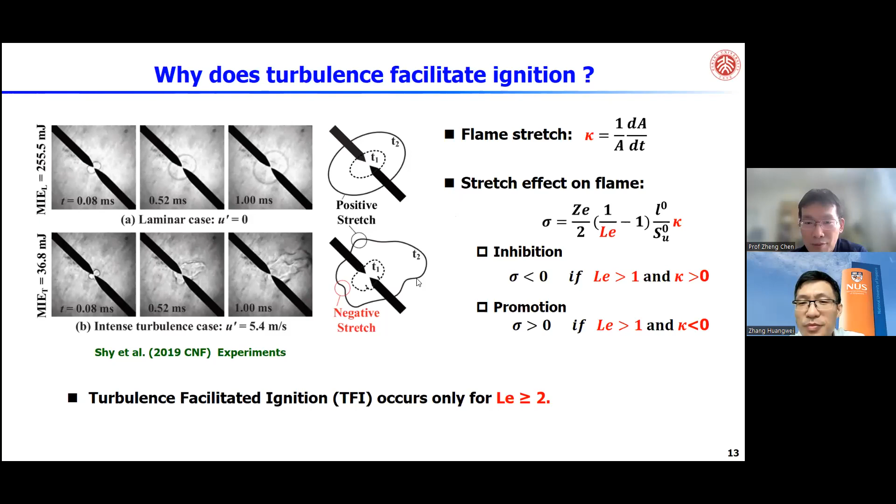The first thing is about the ignition, how to initialize your spark, or what other energy sources at the beginning. How do you ensure the energy and the size of it are equivalent to what you want? Is there any magic to it?

The second maybe is about initialization. How do you usually initialize your case? Maybe you can take one example. I think this is very sensitive.

The ignition phenomenon is very sensitive to the initialization. And for the initialization, you will have some problems with the stability of the solving process at the beginning of your simulation. Can you give some advice?

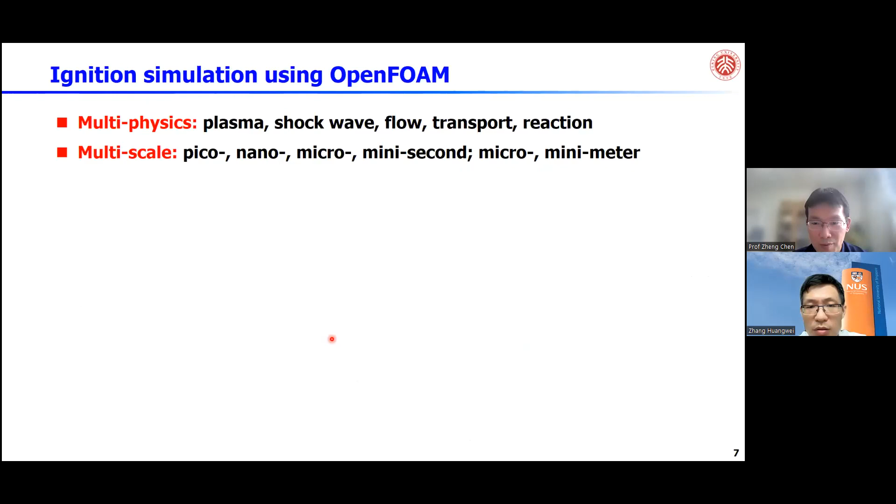Thank you. Actually, the ignition process is very complicated. I think you listened to the talk by Professor Yang. They have this kind of plasma generation, and actually the flame front is kind of like a toroidal shape.

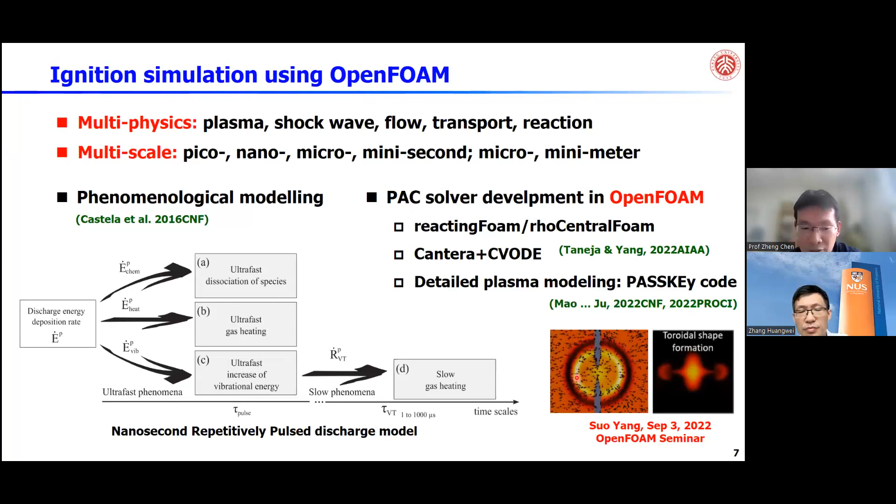This is because the flame curvature and stretch are very complicated. In our simulation, we just neglect this part, because this small plasma channel development will eventually give a spherical flame. So we are doing a very simplified model.

We just add the energy term in the energy equation. This term will be activated at a certain place, within a radius, so in this red regime you have energy deposition. The energy deposition only happens from time equal to 0 to time equal 0.2 milliseconds. So we multiply by the time, multiply the volume and the energy density, to get the energy.

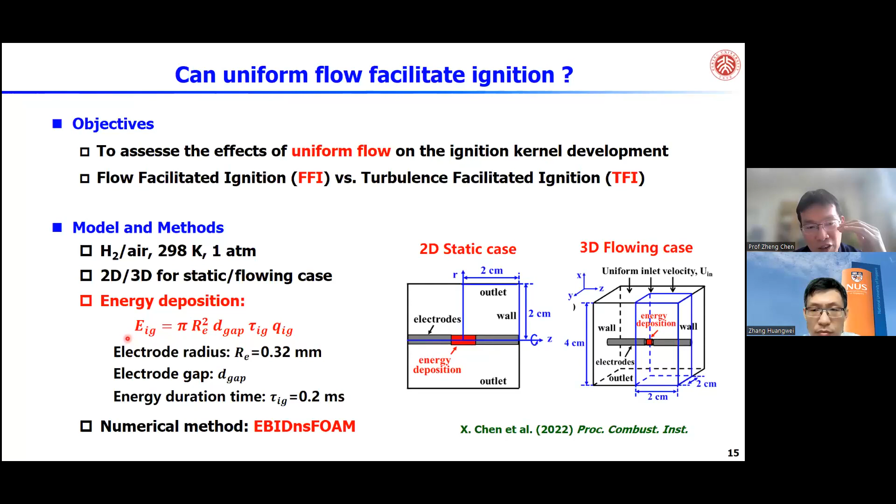Initially the temperature is room temperature. Due to the energy deposition, the temperature will increase because you have a source term in the energy equation, and eventually you have a hot spot inside. So this is one method, just using the source term in the energy equation.

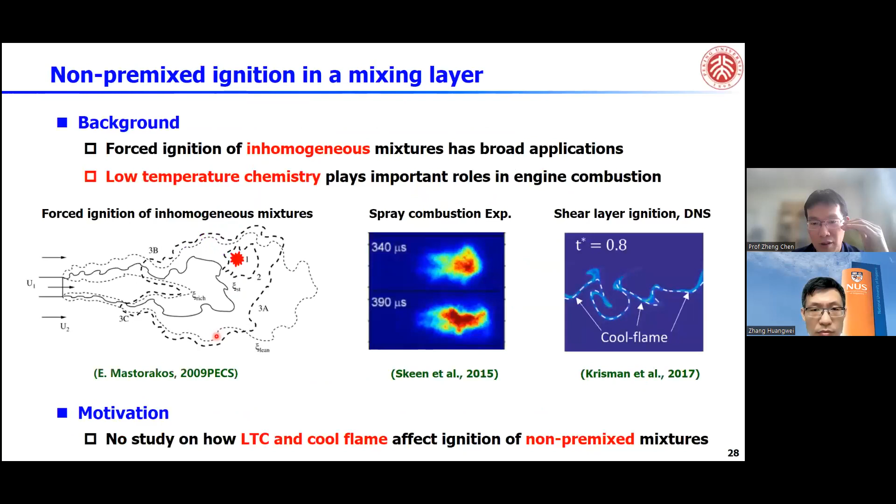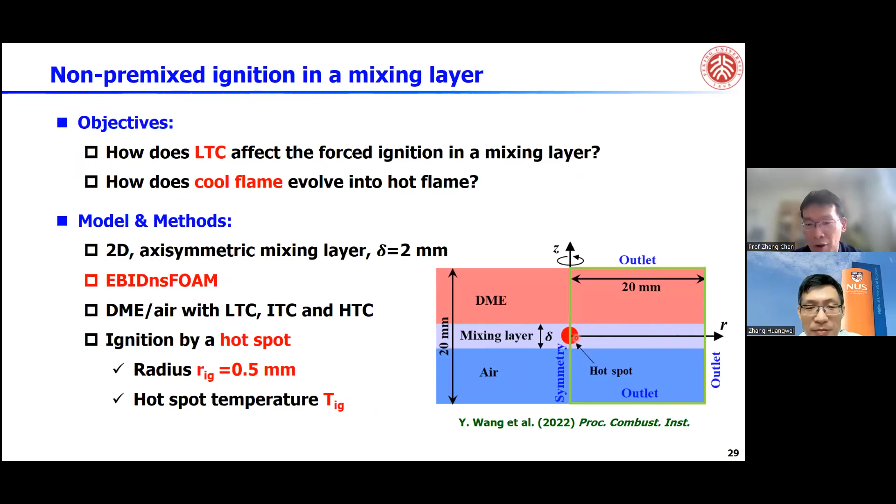Another method is that we use a simplified hot spot. So there's no source term in the energy equation, but the initial condition is different from before. Outside the hot kernel it's room temperature, or some set temperature, but inside the ignition kernel, which has a radius of 0.5 millimeter, the temperature is, let's say for this case, about 1200 K. You can change this hot temperature. So it's just the initial condition to get a hot spot.

It's a simplified process, we don't consider plasma. You are correct, I think the initial plasma kernel, especially if it has a very strange shape, will definitely affect the cool flame and hot flame propagation. But here we only consider the simplified case.

Okay, yeah. Boson, do you have more questions? No, thank you. Okay, thank you very much. So, any more questions from other panelists or audience?

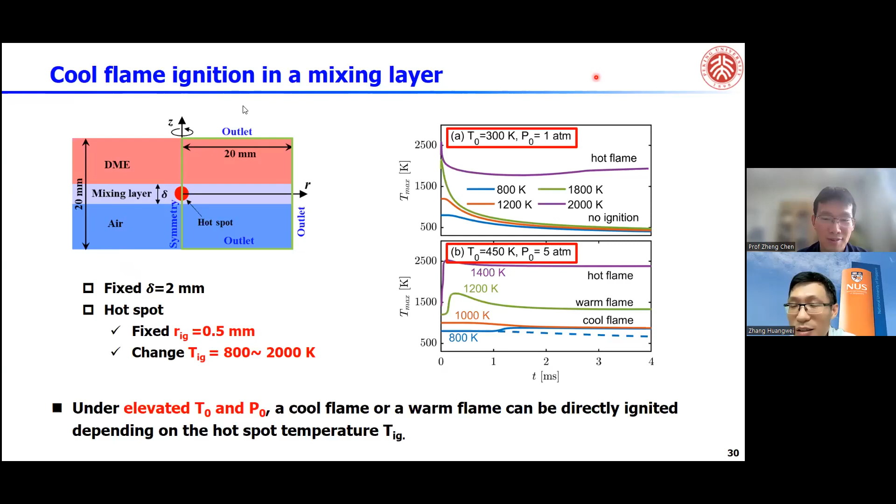Maybe I'll ask one more. For the solver coupling, we couple Cantera and OpenFOAM. So where actually is the chemical integration done? In Cantera or in OpenFOAM? Because normally OpenFOAM can also do the chemistry integration, right?

Yeah, that's a good question. Actually I cannot answer, I think Chen probably can answer this question. Okay, yeah, maybe I can quickly answer this.

So yes, OpenFOAM has its own ODE solvers, and if you run the EBIDnsFOAM code and OpenFOAM, you will get the exact same results. But we are directly calling the CVODE solver by SUNDIALS, so we are not going through Cantera, we just directly call CVODE from the reaction rate computations.

And this is for two reasons: this is faster than what OpenFOAM has with its own ODE solvers, and also more robust. In OpenFOAM you can run into cases where your simulation just diverges, but CVODE is very stable and efficient. So this is why we directly call CVODE.

Okay, I understand. Thank you very much. Okay, yeah. So any more questions? Okay.